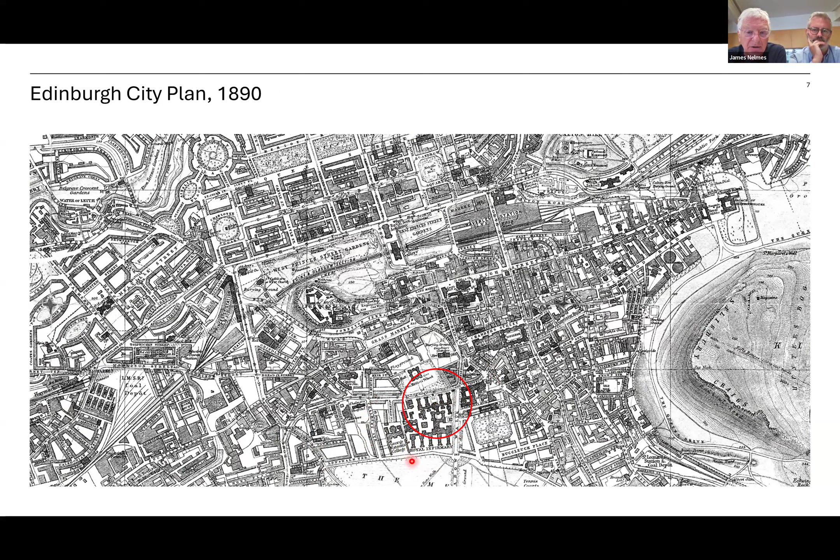The location is right in the centre of Edinburgh, as you can see. The original first ever infirmary was over here in, believe it or not, Infirmary Street. And it was quickly outgrowing its site, so it moved to a site which now overlooks the Meadows. And at that stage, it was the edge of the city. But you can see how big it was. It had a medical hospital facing the Meadows, and it had a surgical hospital facing Heriot's and to the north. The rest of the site eventually became an extension of the hospital too. And the whole thing is now part of the Quartermile development, which was developed in the early years of this century. The original plan looks like this, and you won't be able to see the words, which is just as well because it's upside down to the writing.

But the most striking feature in the middle is this circle, which says ice store on it. And we never found it when we dug down there, so we don't know if that was ever built. But the rest was built almost exactly as per the plan, with 20 wards, more or less the same shape, each of which had a turret at the ends for bathrooms and things like that, and a nursing station at the inboard side, which we call the knuckle, as it joins the main corridor.

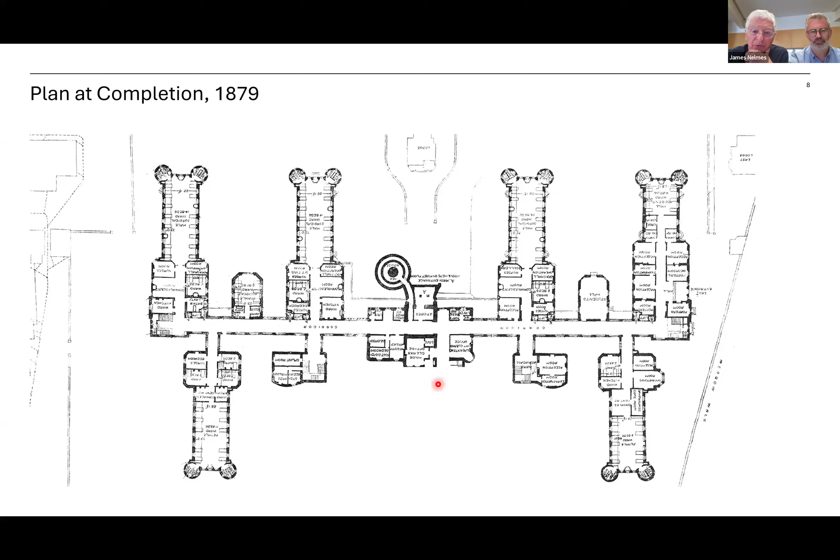So 4 wards to the north, 2 to the south, but over several levels, 3 on the north and 4 to the south. And right in the middle, of course, is the clock tower, which is the centerpiece of the composition. And that's what it looked like. We've got lots of old pictures of how it was. And this is roughly, we think, about 1908.

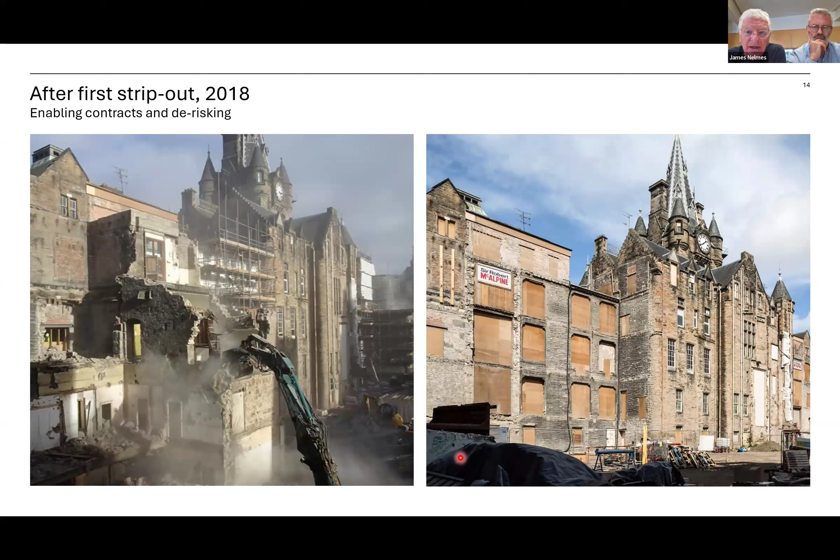And the wards, many of them had been disfigured like this, with suspended ceilings, some air conditioning and additions, which really made them unrecognizable. So we had to strip all that out, and we started by getting rid of the extraneous extensions and blocking in openings which were otherwise going to be dangerous. And then I thought at that point we should start thinking about what is a Futures Institute. So James, over to you. Thank you, Rab.

So I suppose what was a little bit different about this project, I mean, any architectural proposition is a sort of negotiation of a site, but also a brief. And in this instance, those things didn't come in series. And the challenge of the building, we were able to get on with de-risking, getting on with some of those demolitions and strip out contracts at the same time as developing the brief with the university.

And maybe the first thing to say is that the Edinburgh Futures Institute is an entirely new institute within the university. And truth be told, they didn't actually know what it was when we started out on the journey. So it took several years as we were doing all this work to the building. The university was thinking what actually is an Edinburgh Futures Institute. So really what it comprises is a raft of different types of function. So there are teaching and learning spaces, so study space. There is research space, that's academic research, but also third-party research as well.

And then the third element in the mix is external partners. So what that means is startup companies, but also established businesses, public sector organizations, and even third sector NGOs. So there's really quite a mix of people within the building. This is Marion, who is now the director of the Institute. She dubbed it as radical interdisciplinarity. People have talked about cross-discipline working within higher education for some time.

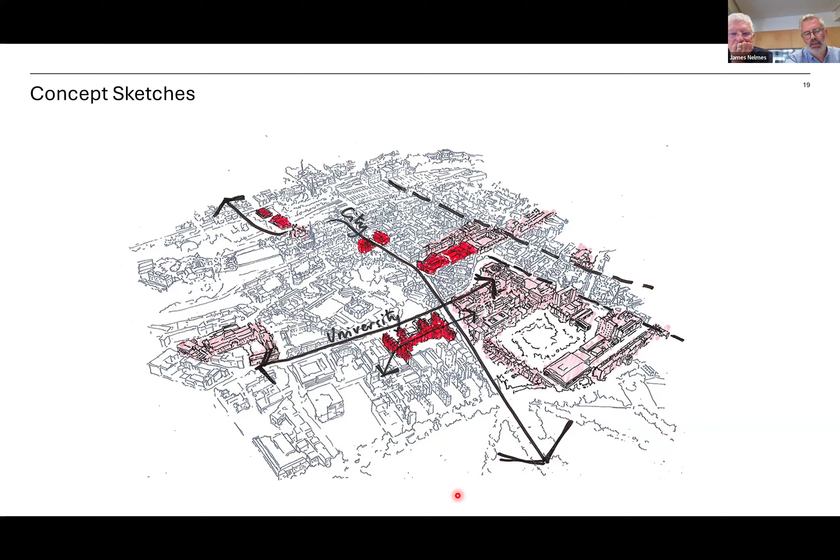And so one of the very early concepts really was the creation of a civically scaled space at the front of the building. So the clock tower with its incredible composition, reopening that front door that, as Rab describes, has been closed for something like 60 years, creating a new civic space, which meant one of the more challenging things that we discussed with listed buildings and Historic Environment Scotland was the removal of the gatehouse at the front. So that allowed us to create this space where they can hold events and form this big new front door and a new identity for the university.

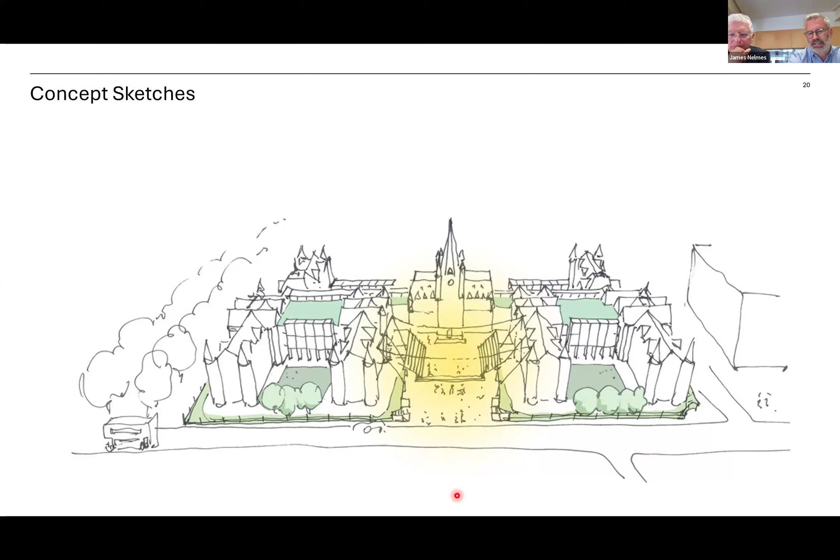The ways that we went about fitting the brief in and creating a flexible and adaptable building, as Rab touched on, we did a series of judicious demolitions. So a lot of the accretions that had come over time with the NHS were removed. And back in their place, we made a number of insertions, and there's maybe three key ones. There are new blocks that slip into the courtyard spaces, and they can house bigger, more adaptable types of spaces.

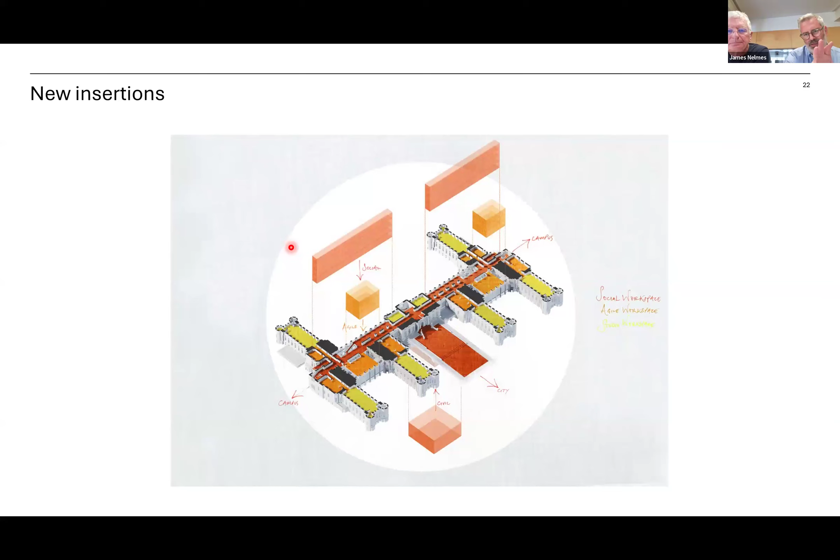The corridor was doubled in width, so it becomes a central street and spine. And then the third element was the creation of a new, very large event space below that civic square. So it's a space that holds 450 people seated. So those three big moves really helped us work with the building, unlock its potential, and turn it away from being about isolation and into a building about integration.

Many of the spaces we worked through, all the fit out of the spaces, they're all really about flexibility. So looking at the interiors, how can we create volumes and spaces that can be used for all different types of pedagogy, from traditional seminar and lecture layouts to more modern fusion teaching, as it was described, where there are many people in the teaching space online.

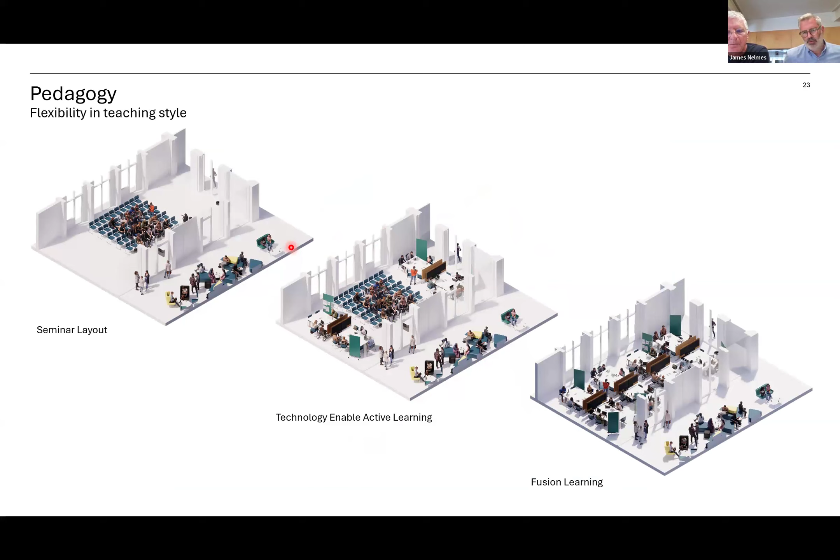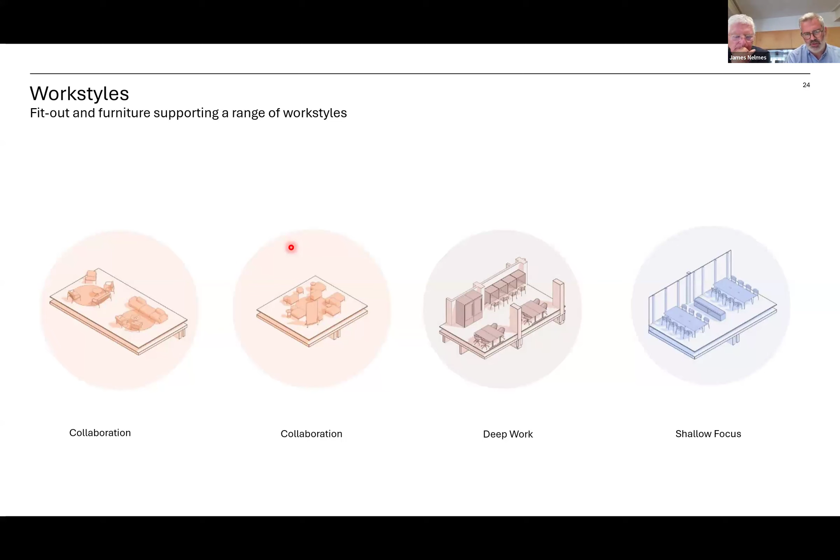In the work areas, in a sense, these things are to a degree bread and butter, but looking at how you create collaborative spaces, how you create deep work spaces, which is often focused work where people want to be private, or looking at shallow focus, which is more typical open plan type of work.

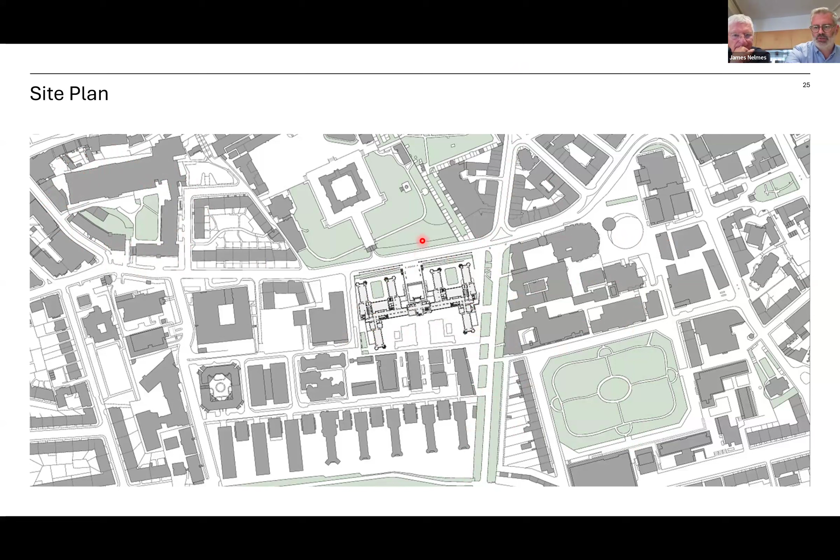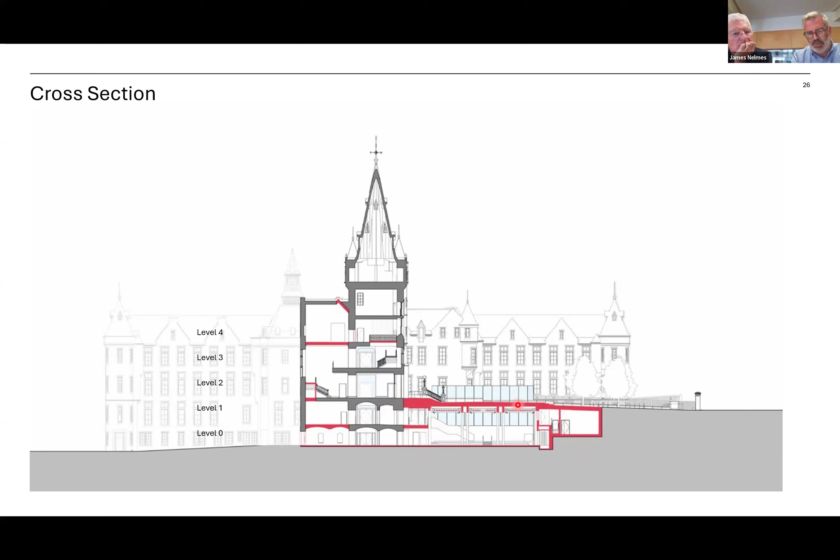This is a cross section going through the clock tower. Like many of Edinburgh's buildings with our wonderful topography, you actually enter the building in the middle of the section. So you enter with 2 floors below you and 2 floors above. You can see everything here highlighted in red is new. So the creation of the new big event space below the civic square. I'll just move on.

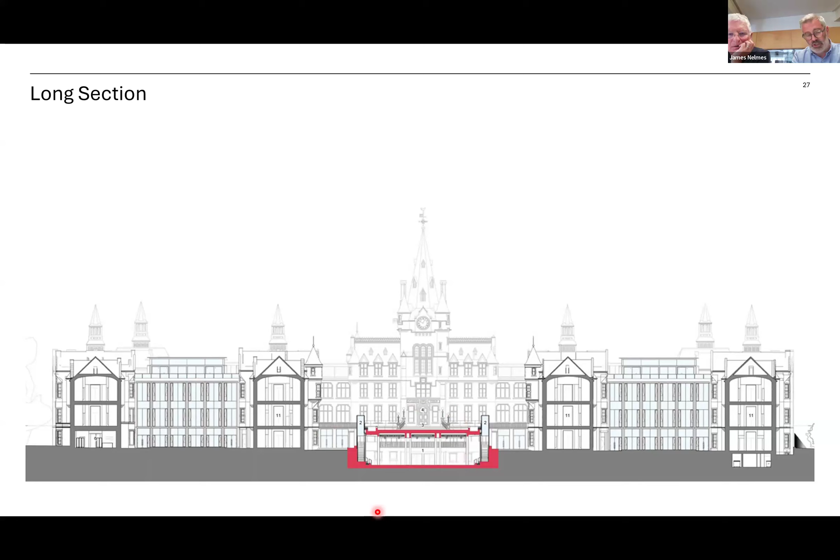Long section going the other way. So this is cutting through 4 of the wards. Each of the wards at each level takes around 50 to 60 people, depending on what mode it's in. The larger infills that you can see in elevation here in blue, each floor they take around 120 to 150, so double the cohorts. And then the large space, as I mentioned, at the bottom is around 450 seated.

This maybe shows you, and I'll show you some photographs in a minute, how much work actually went into stitching everything back together. So everything there in red is new. We had to rebuild something like 50% of the building. All the timber floors were rotten. They all had to be pulled out and rebuilt. All of the walls and linings, the lath and plaster, again had to be removed and rebuilt. So there was a tremendous amount of construction that people perhaps don't realize.

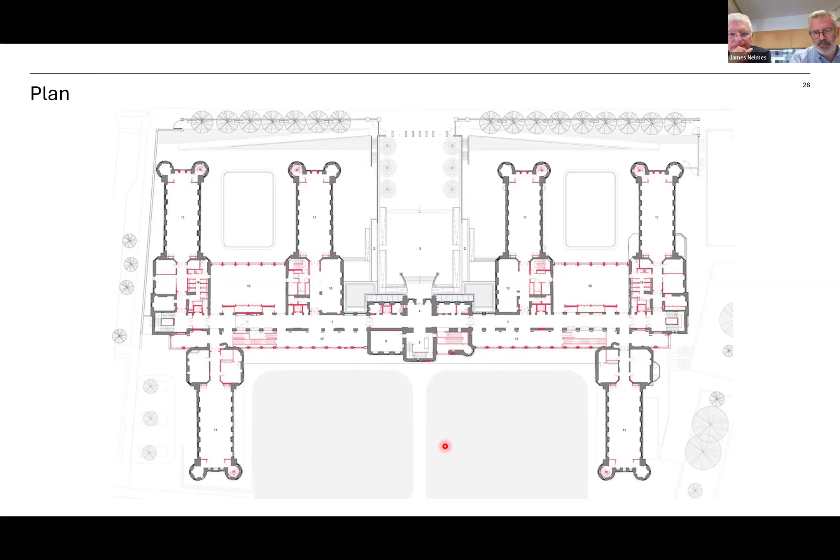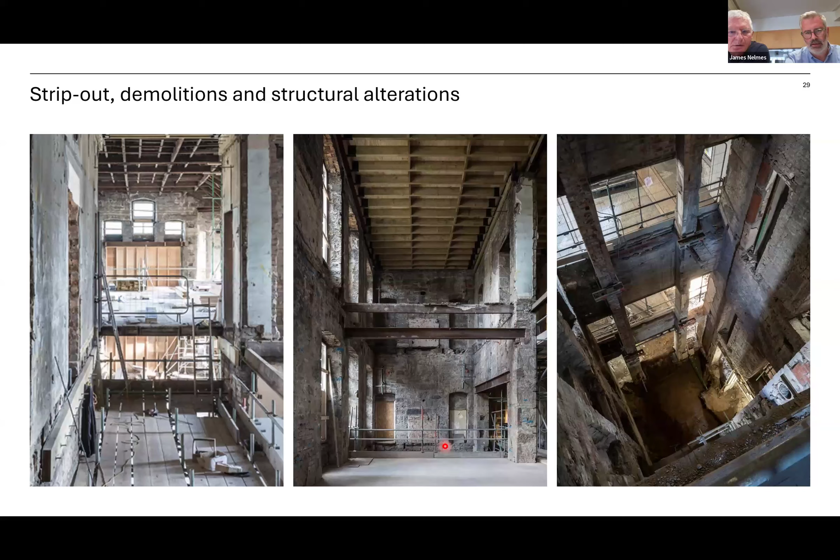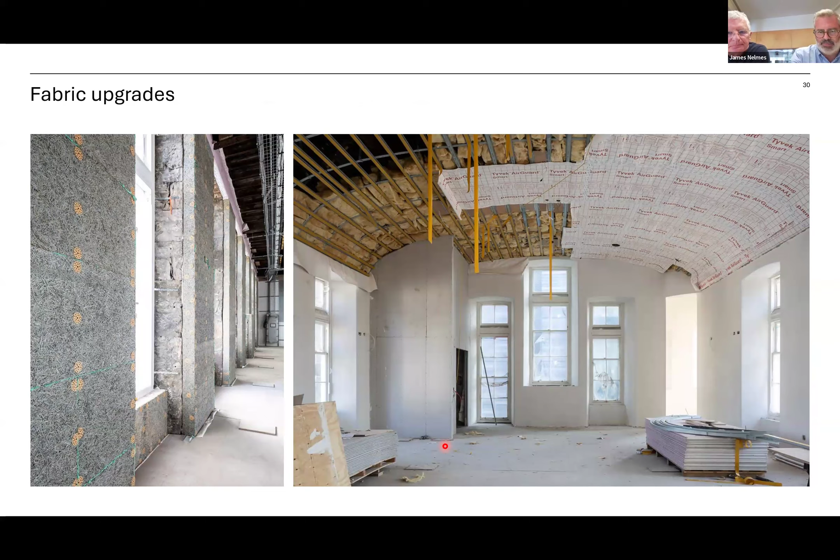But there's a turning point when you start going forwards again and putting these spaces back together. And in so doing, we were able to improve the thermal performance of the buildings with breathable wood wool insulation, and eventually get back to the proportions of the original wards which you saw in 1908, which had been lost completely under the NHS's auspices.

In terms of services, the building is plugged into the university's combined heat and power plant. So there isn't actually a heating plant on site. However, there is pipe work for distribution to bring heating to the building. With such an incredible skyline and roof line, we needed to avoid putting plant on the roof level. So the distribution is all done at the lowest basement level in a walk-in trench that runs the full 150-meter length of the building. And from there, it pops up into each of the wards.

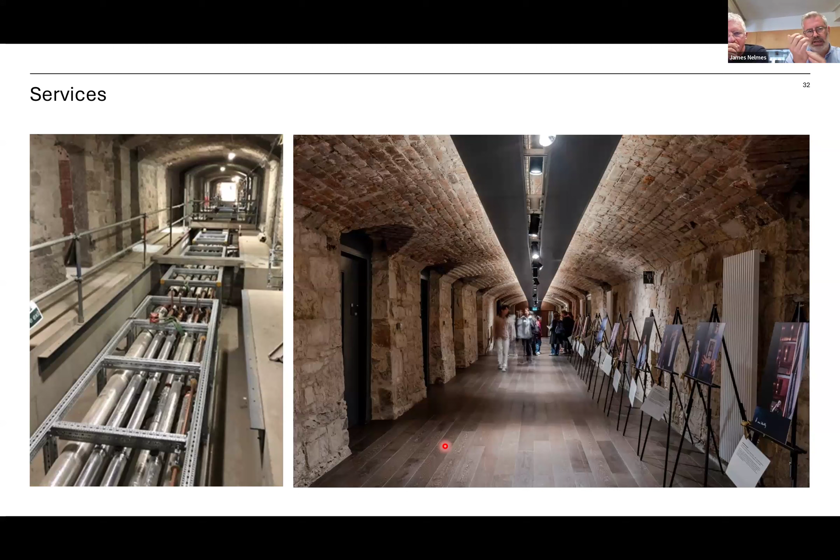I should mention that most of the building is naturally ventilated. So all of the ward spaces and the street space, the corridor spine, are naturally ventilated. It's only the high occupancy spaces that need to be mechanically ventilated.

There was a tremendous amount of conservation work. As Rab touched on, we worked with Consarc Design Group from Belfast, who are absolutely fabulous. The roofs were all reslated, all the lead work was redone, much of the damaged stone was replaced, lead work, finials, and even down to gold leaf.

As part of the conservation works, Consarc looked to make certain improvements, so particularly rainwater goods which were replaced, lead safes were put in, telltale hoppers. A lot of the trouble that buildings of this kind are having at the moment is this increase in intensity of rainfall that we're receiving today, and that's due to increase. So adapting buildings to be able to survive the predicted changes to the climate over the next 100 years.

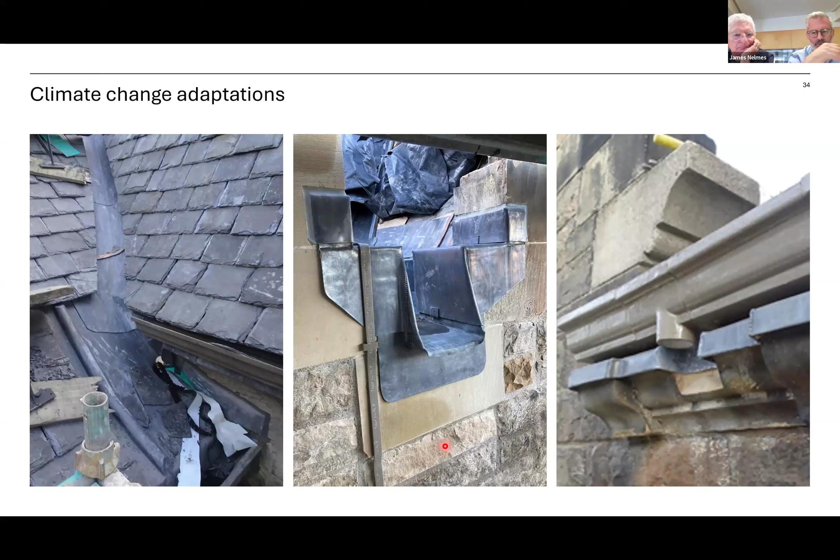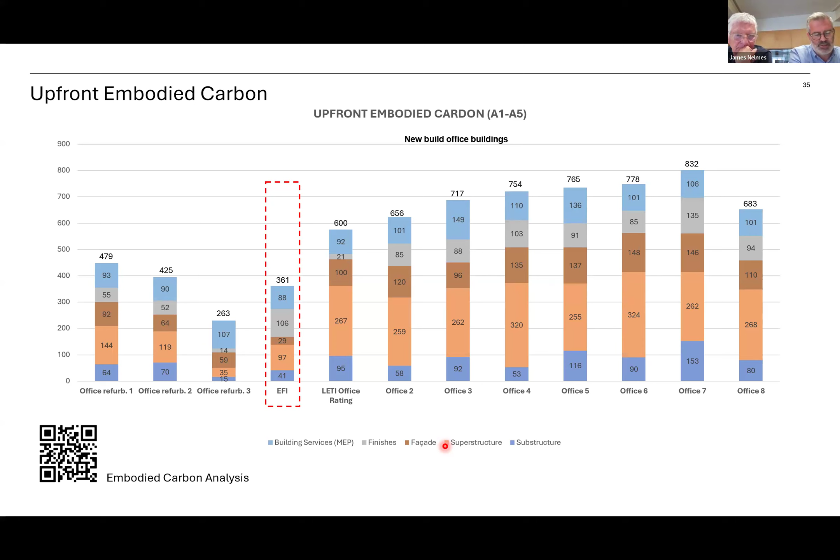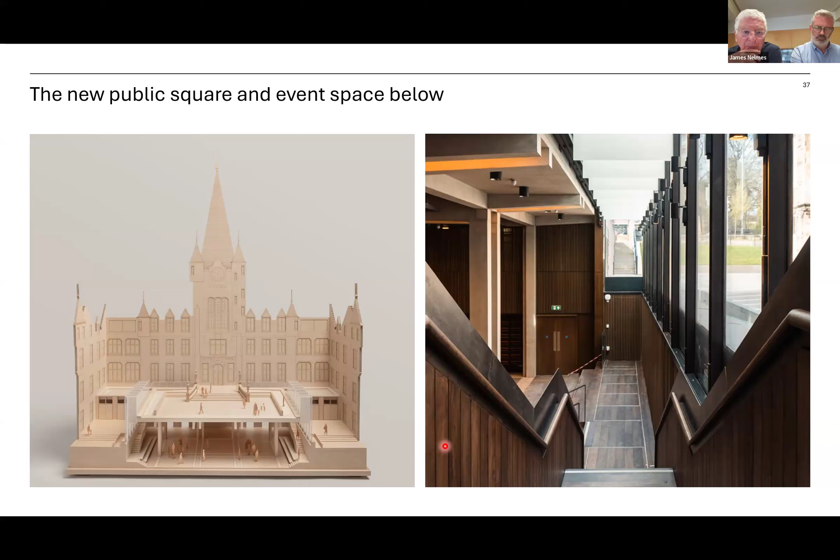So here are the glass boxes with a couple of posers on the right-hand side for scale. And you can see that what we've got on the left-hand side is the square is at level 2, one level up from the place where the slide is taken. The space where the light box stops is level 1, and then level 0 is the floor of the space inside of it. And here's the space inside.

So it's an enormous structure. It's 18 meters square. So it's got similar characteristics, according to the contractor, to a bridge. And so they brought in engineers to do pre-cambering and things like that to make it settle properly. And we wanted to make it visually a bit lighter than the beams might have suggested. So we split both the columns and the beams into pairs like this and used that as a kind of lightening device as well as a light fitting.

And I think the results are really successful in the sense that it doesn't look heavy. If you look up between the beams, you can see a slab partway up, and that is halfway up the size of the beam. There's a top slab where the square is on top of that. And we've included theatre equipment in here too, so they can have it as a flat floor with all the seating retracted. And we've had dance performances and things like that in it.

And you can see the amount of daylight in it is good on the left and the right-hand side. And there's a few details. Now, the baffles that I mentioned are translucent. They reflect the light, but they also correspond with the stairs from the mezzanine at level 1. So there are drinks receptions and the like on the level 1 mezzanine straight down into the hall, or you can enter directly from level 0, which is, of course, ground level on the south side of the building.